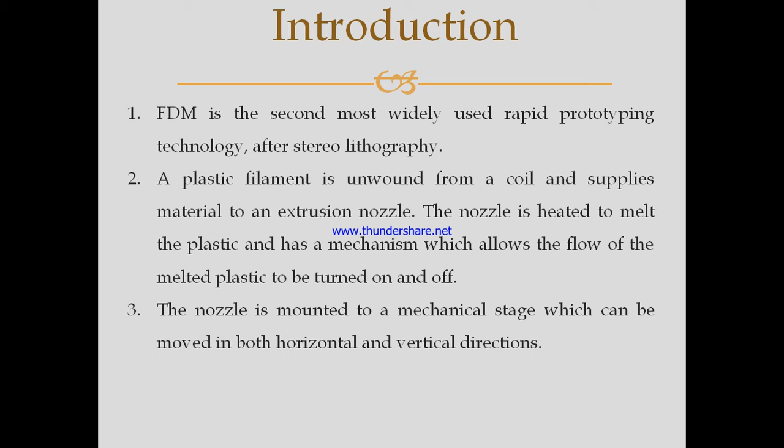That is one type of 3D printing method. Fused deposition modeling is the second most widely used rapid prototyping technology after stereolithography. A plastic filament is unwound from the coil and supplies material to an extrusion nozzle. The nozzle is heated to melt the plastic and has a mechanism which allows the flow of molten plastic to be turned on and off. The nozzle is mounted on a mechanical stage which can move both horizontally and vertically. As the nozzle moves over the table in the required geometry, it deposits a thin bead of extruded plastic to form each layer. The plastic hardens immediately after being squirted from the nozzle and bonds to the layer below.

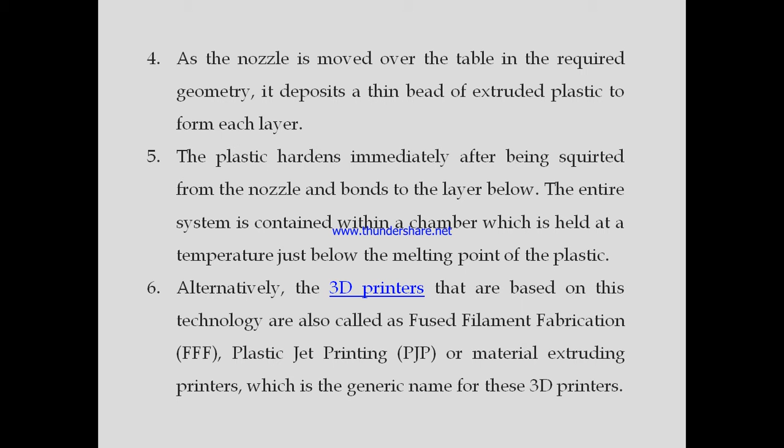The entire system is contained within a chamber held at a temperature just below the melting point of the plastic. So 3D printers based on this technology are called fused filament fabrication, or plastic jet printing, or material extrusion printers, which are the generic names for this type of 3D printer. Look at this.

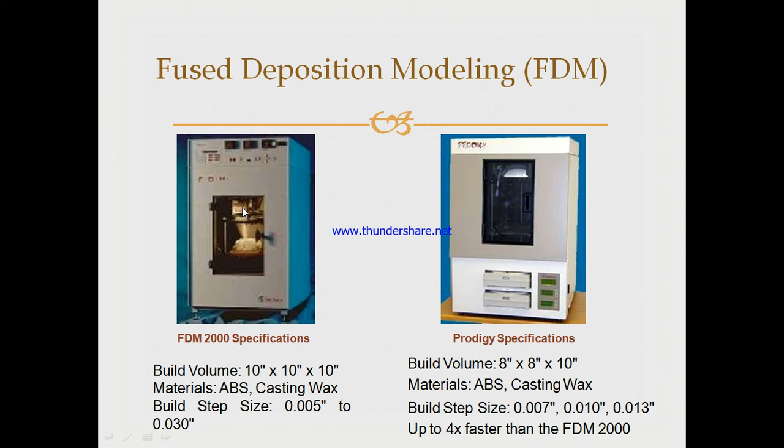The entire extrusion assembly is allowed to move in X, Y, and Z dimensions by a motorized system. This head assembly can move in the X direction, Y direction, and also the Z direction, controlled by a motorized system. Another motor, called a stepper motor, is used to advance the thermoplastic material into the nozzle. All movement of the head and raw materials is controlled by a computer.

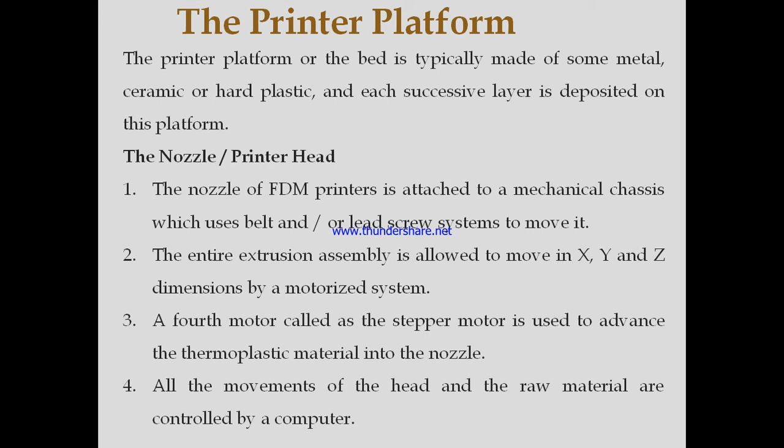So it is a material that is repeatedly melted when exposed to heat and resolidified when heat is withdrawn. The thermoplastic filament or metal wire is wound as a coil on a mounted spool. It is then fed through the printer nozzle. The better class of 3D FDM printers allows the temperature of the nozzle to be maintained just close to the glass transition temperature of the material being extruded.

Why is the temperature of the nozzle maintained just close to the glass transition temperature? Because it allows the material to be extruded in a semi-liquid state but return to a solid state immediately. This results in better dimensional accuracy. Remember, this material, when it gets out in a plastic state, but when it comes into contact with the heat, it gets semi-liquid. It becomes semi-liquid, and when it becomes part of this product, situating layer by layer, it immediately solidifies.

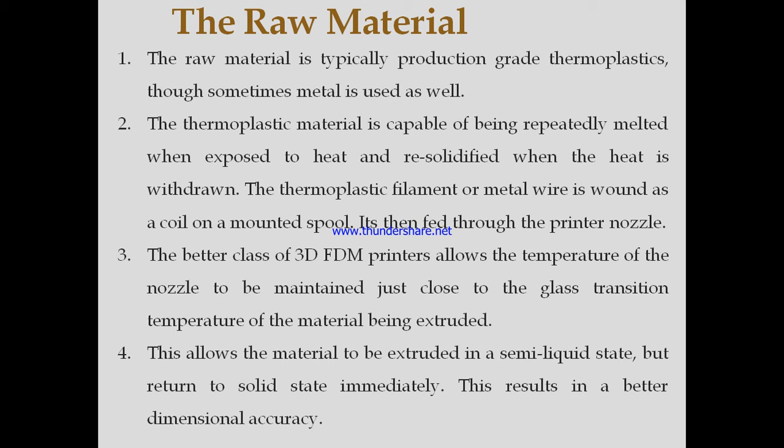In principle, any thermoplastic can be used as a raw material for FDM printers. Commercially, a few popular choices of raw materials include nylon, ABS, that is acrylonitrile butadiene styrene, and various polycarbonates, polylactic acid or polystyrene, and also thermoplastic urethane, etc. These materials are used for commercial purposes.

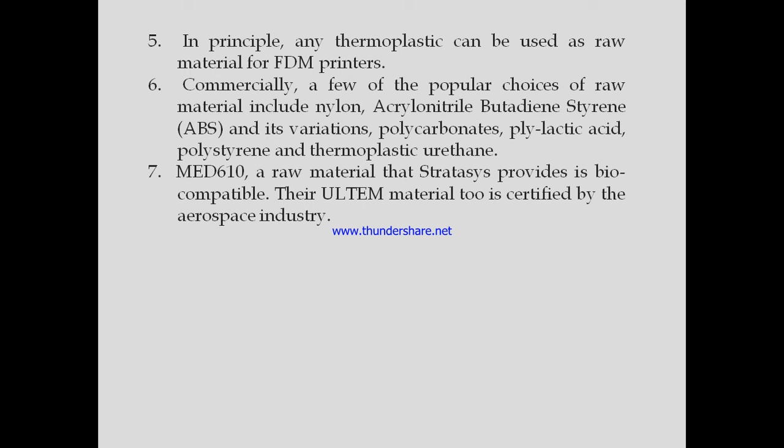MED 610, a raw material that Stratasys provides, is biocompatible. Stratasys is a company which generally uses MED 610. Their Ultem material is also certified by the aerospace industry.

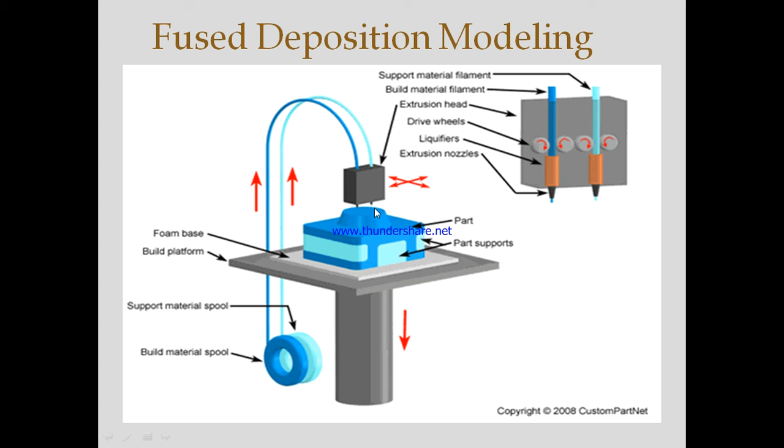According to this, it can form a shape on the base foam, layer by layer, as per requirement. Its direction and motion is totally controlled by the CNC machine.

So how accurate are 3D FDM printers? Remember that 3D printers work by depositing raw material layer by layer along the X, Y, Z axis.

The accuracy of the 3D printer, or FDM, depends upon the minimum distance the nozzle can travel vertically along the Z axis, and the minimum distance it can move to capture more points along the curve, which will increase the accuracy.

For Stratasys 3D printers, the pioneers of FDM printers, the current best possible dimensional accuracy is about 0.127 mm. The choice of raw material plays an important part in achieving dimensional stability.

Because different raw materials have different liquid temperatures and solidified temperatures, changing the material can affect your accuracy.

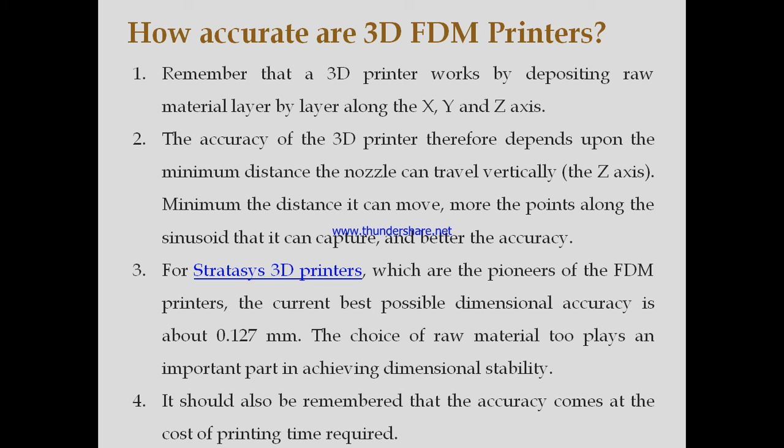It should be remembered that accuracy comes at the cost of the printing time required.

What are the advantages of FDM? The raw material used is thermoplastic, such as polyurethane, which is durable and maintains dimensional integrity.

The raw material is inexpensive, durable, and maintains dimensional integrity, which is why thermoplastics are less costly. There is also a wide choice of raw material.

A number of raw materials can be used as inlet material for the FDM process. They are affordable, have low turnaround time, easy fabrication, minimal wastage, easy removal process, and easy handling.

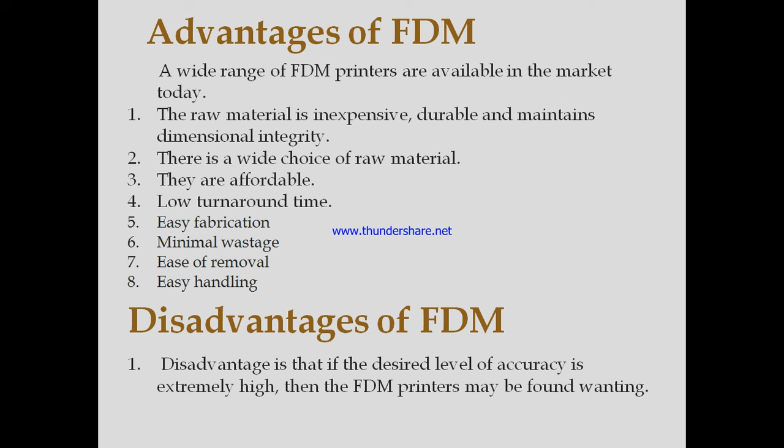Apart from these advantages, FDM has disadvantages: when the desired level of accuracy is extremely high, the FDM printers may fall short, since achieving very high accuracy requirements is quite difficult.

What are the applications of FDM? Creating prototypes for fit, form, and functional testing, for rapid tooling patterns and mold inserts, and for creating and testing parts that work under thermal loads.

Production of precise, complex end-use parts, for example jigs and fixtures. Sectors that use FDM 3D printers include automotive, aerospace, manufacturing, medical, architecture, consumer goods, fashion, education, and research.

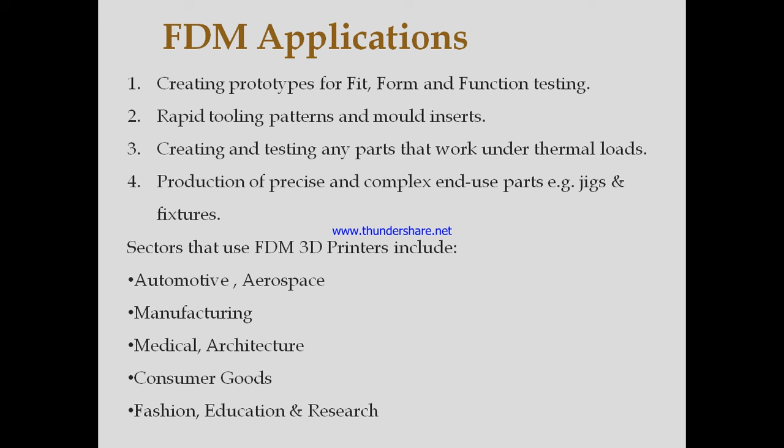Before going to the final slide, we must compare the three different additive 3D printing processes: SLA, which is stereolithography, SLS, which is selective laser sintering, and FDM, which is fused deposition modeling.

Materials available for SLA are UV-cured photopolymers, and ABS or PP as in the case of FDM, while laser-cured nylon is used for SLS. For tensile strength, SLA and FDM give fair tensile strength, but SLS gives poor tensile strength.

For resolution, SLA generally gives good resolution compared to SLS and FDM. For thin walls, FDM gives very poor results compared to SLA and SLS.

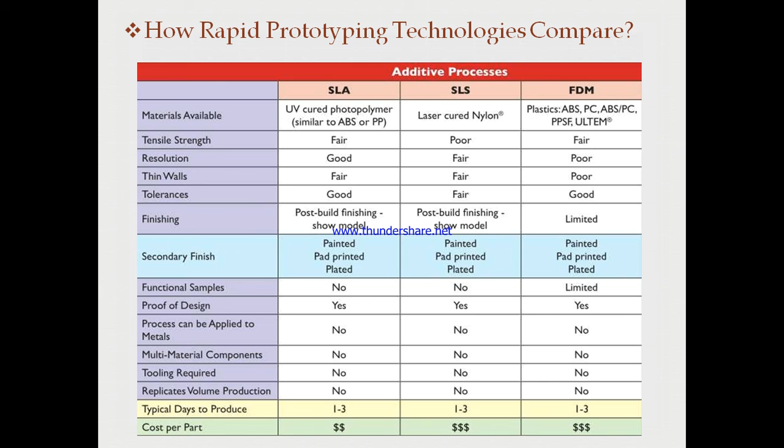In this way we can compare SLA, SLS, and FDM on different parameters, such as whether the process can be applied to metals, multi-material components, tooling required, and replicate volume production. This covers the comparison of stereolithography, selective laser sintering, and fused deposition modeling.